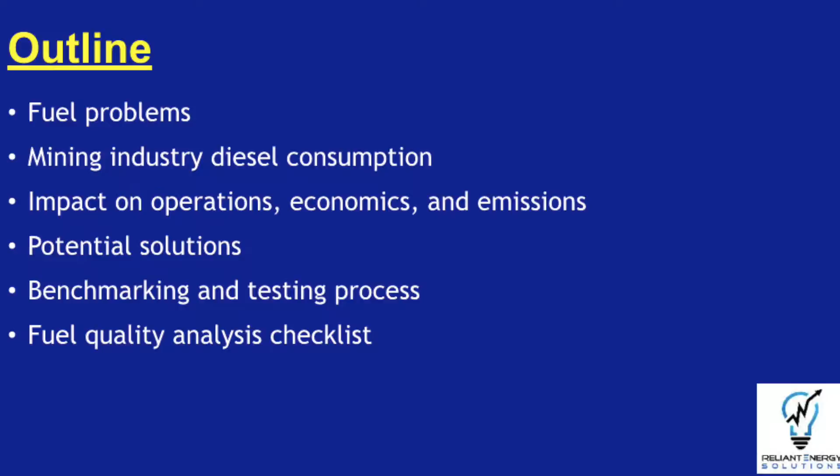Our outline, just going to give you a quick rundown of things I'm going to talk about. Fuel problems, remember it's very, very key. Mining industry diesel consumption, potential solutions that I see in the market, and benchmarking and testing to evaluate the effectiveness of fuel additives, and finally, a fuel quality analysis checklist.

So what are some of the common fuel-related problems that the mining industry is seeing today? This is probably just a partial list, but it focuses on the underperformance of the fuel expenditure made by mining companies. Moisture is a key contaminant because it leads to clogged fuel filters, clogged fuel injectors.

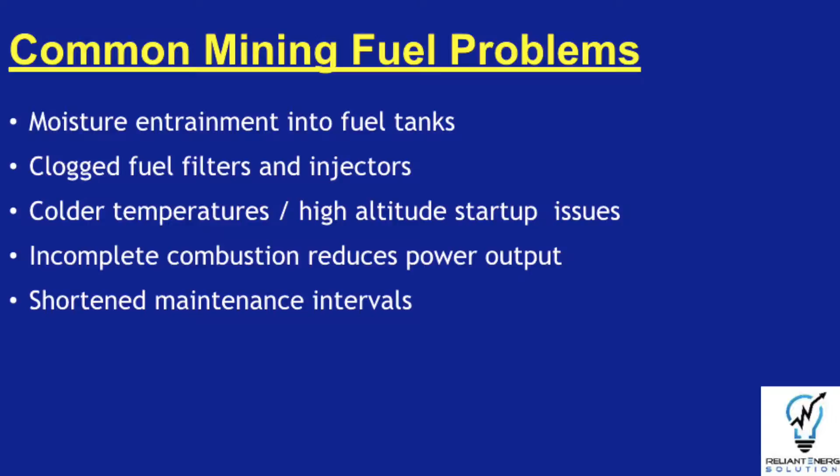Poor fuel quality also leads to the incomplete combustion of the diesel fuel, which wastes fuel expenditure dollars. And finally, the long-term problem of compressed maintenance intervals due to poor fuel quality costs mining companies a lot of money.

So if we look at the top 5 largest gold producers, we see that the relative gold production from 2005 to 2013 has been fairly stable in the 23 to 27 million ounce range. But let's focus now on the increased gallons of diesel fuel required for each ounce of gold produced. Over the last 8 years, it's doubled from around 12.7 to 25.8, or a 9% annual inflation in diesel use.

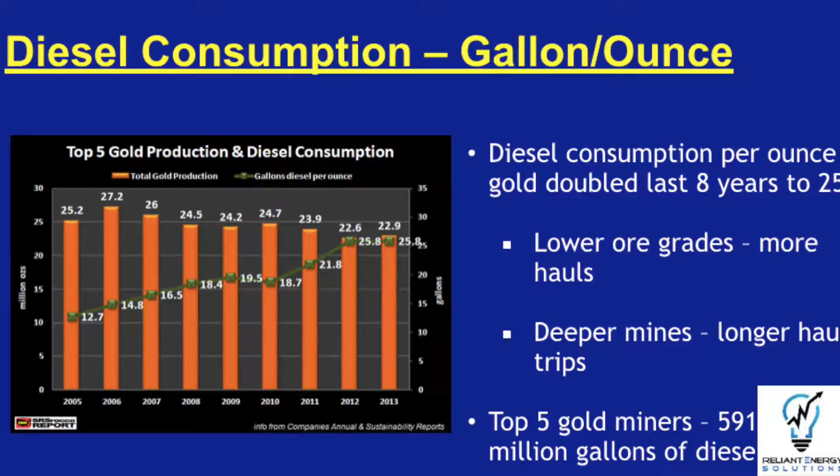So what are some of the reasons for increased diesel use? Well, we've learned earlier the lower ore grades take more ore to get the same amount of finished product at the end. Also, deeper mines, longer haul runs, more diesel consumption. But just for the top 5 gold producers, they've consumed almost 600 million gallons of diesel per year.

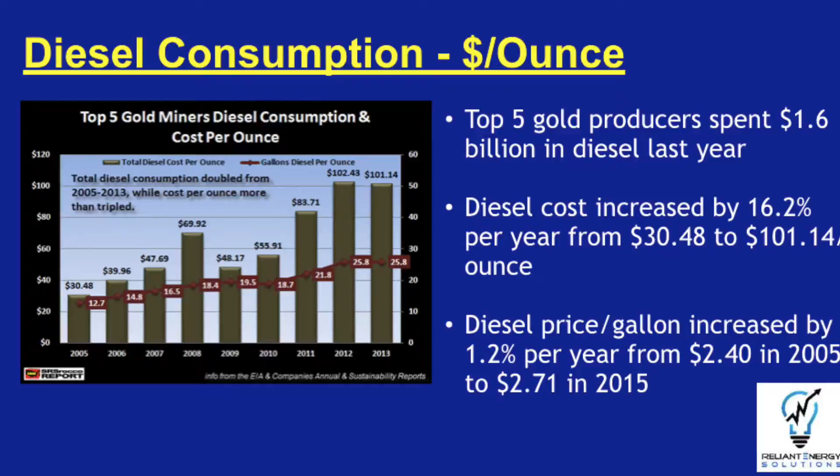Let's change the focus from diesel consumption, not in gallons per ounce, but in dollars per ounce. Not only is diesel use per ounce of gold increasing, but when we factor in the diesel price increases over the last 8 years, it's about a 1.2% per year inflation rate. Total amount of diesel expenditures by the top 5 gold mining companies is around $1.6 billion. Even without diesel price inflation, the use of diesel to produce gold has been increasing at an alarming rate.

So what are mining companies going to do to address this rise in their costs? We need to find ways to get more value out of our fuel expenditure dollars. If you look at the fuel issues, one of the villains of fuel quality and its deterioration is the presence of moisture.

This happens the minute diesel is injected into the storage tank, as shown on the far left, in a clean tank. In areas of high humidity, such as South America and Sub-Saharan Africa, lots of humidity, opportunities at refill for moisture entrainment into the tank start this cycle.

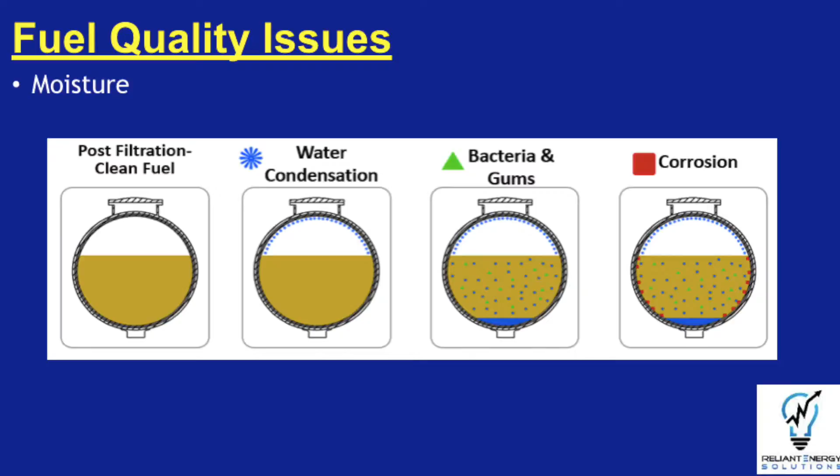Once moisture is inside the tank, as shown by the blue dots on the top part of the tank, second diagram from the left, it hastens the formation of bacteria, gums, and corrosion. All of these factors are bad actors that contribute to poor fuel quality, increased tank maintenance costs, shorter tank maintenance intervals, higher fuel consumption rates, and yes, higher fuel expenditures.

The contaminants in the fuel, remember, bacteria, gums, and corrosion, act to lower the engine's operational performance. They clog fuel filters and fuel injectors. One of the clearest indications of contamination is the residue left behind in the combustion process. You'll see in the simple burn test, the picture on the top. The left container represents the preferred combustion process. Full hydrocarbon combustion, no residue.

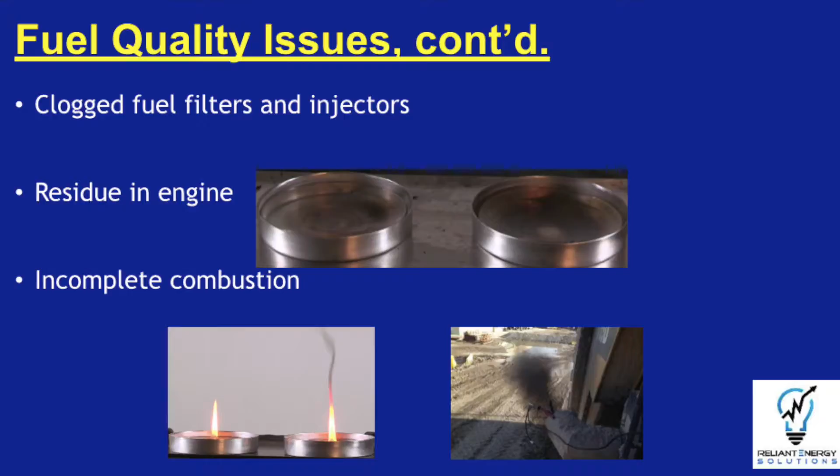The fuel is contributing to the engine's work, and we're getting maximum value for our fuel expenditure. The container on the right has a residue showing incomplete combustion. This residue, think of it as money, fuel expenditure money left on the table. This incomplete combustion process manifests itself also in the black smoke and soot on the bottom picture on the left.

The ideal combustion is the vessel on the left. The poor combustion is the one on the right, with the black soot and smoke coming from that combustion process. Think of your fuel expenditures from this soot going out the tailpipe of that engine, haul truck, or engine generator. Incomplete combustion leads to shorter maintenance cycles and unnecessary costs, and not getting as much value out of our diesel fuel expenditure.

Another adverse effect of poor fuel quality is the engine's ability to provide the maximum power that the equipment manufacturer has prescribed for the fuel expenditure made by the miner. When we examine this thermal image of the combustion process, a few things really jump out. The left combustion has a larger flame, higher temperatures, more soot, more smoke.

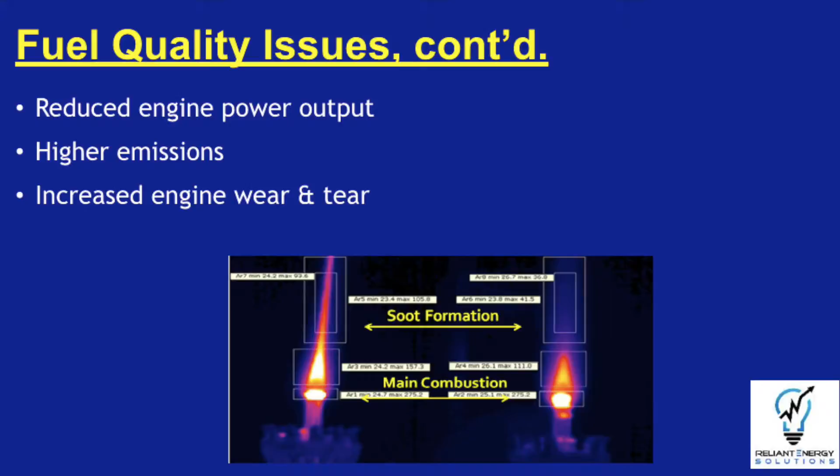Think of the smoke as your fuel expenditure dollars leaving out the exhaust, out the tailpipe of the haul truck or engine. Less productive work for our fuel expenditures. The temperatures are higher on the left, which indicates that more productive work is going out the tailpipe rather than what you're paying for in diesel fuel. Higher combustion chamber temperatures, more engine scarring, point to increased engine wear, compressed maintenance cycles, increased consumption of diesel, and once again, higher costs for diesel.

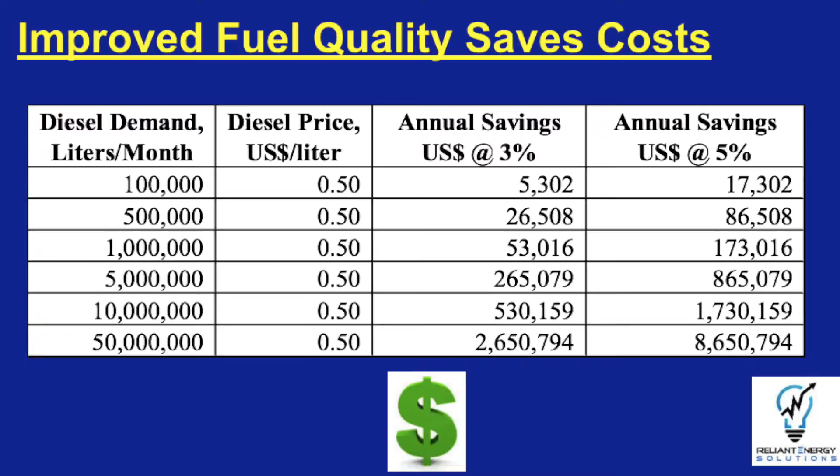As a certified energy manager, I study this issue and look at ways that we can save money on our diesel fuel expenditures. So this chart shows what an increased fuel value with increased fuel quality means to a miner. On the far left, the diesel demand in liters per month, and at a rough estimate, 50 cents a liter, $2 a gallon price of the diesel, you'll see that achievable 3 and 5% savings net of the additive can yield significant amounts of saving for your operation, obviously at different diesel demand rates. This is the Jerry Maguire part of my presentation, the show me the money, if you will.

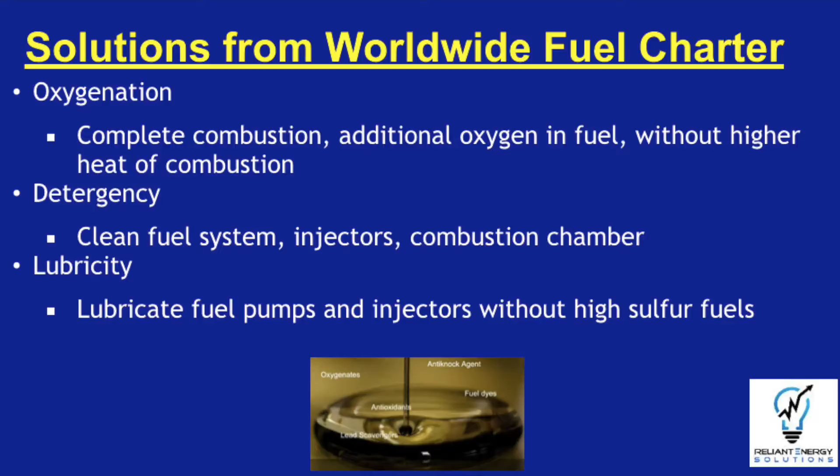So what do we do to correct fuel deterioration, which means that we have less engine work being done, more fuel consumption, higher diesel fuel costs? In order for fuel to do its work inside the engine to reduce overall maintenance, we need three factors, as recommended by the Worldwide Fuel Charter. Number one is oxygenation. This ensures the complete combustion of the diesel fuel inside the combustion chamber. Remember that black smoke and soot is your dollars for fuel leaving out the tailpipe. The second thing is detergency, to ensure a clean fuel system, to clean the injectors, to clean the fuel filters, and prevent those from being clogged.

And finally, lubricity. Since 1993, when sulfur limits for low sulfur diesel were at 500 parts per million, the regulations have been strengthened, tightened, so that in 2006, the regulation for ultra low sulfur diesel was reduced down to 15 parts per million. This sulfur in the fuel in past years helped to lubricate the engine in the combustion process. Without some way of lubricating the engine with an additive with lubricity, you will get some engine scarring, reduced maintenance intervals for equipment.

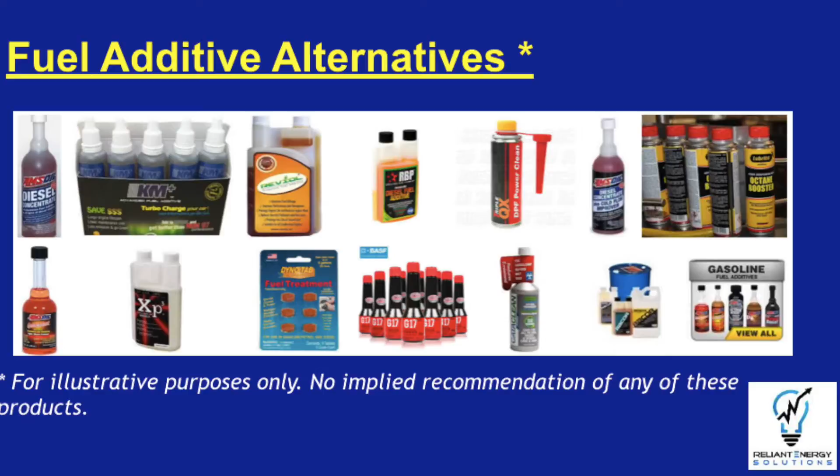There are lots of fuel additives out in the marketplace today, as you can easily see. So what's the right one for your application? Which one has the most economic and environmental impact to your bottom line? And which one gives you the performance that is repeatable and reliable for your mining operations and to reduce your diesel costs? So let's look at some metrics.

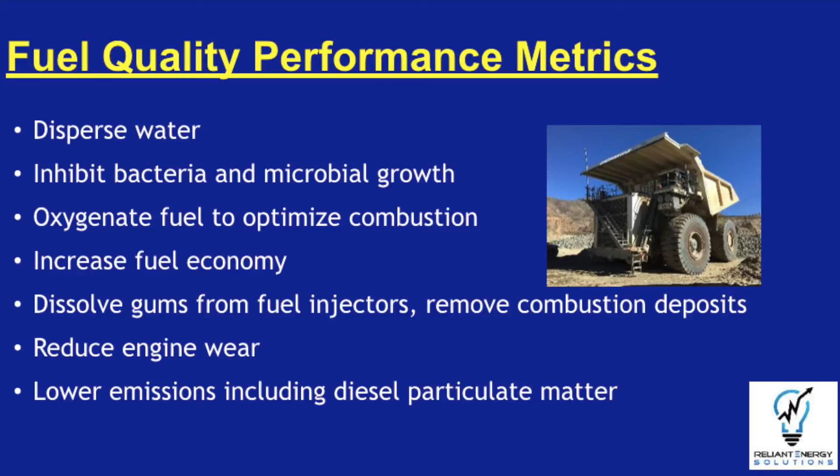So if additives provide value, what are the performance metrics that we should be interested in? Remember the bad actors, water, bacteria, corrosion. They prevent optimal performance and cost us money. The three fuel quality enhancers that we just talked about for fuel economy must be present: oxygenation, detergency, and lubricity. We should be able to document that our operations are doing the same amount of work, albeit with less fuel consumption, less fuel costs. We ought to see lower emissions, lower combustion temperatures, and longer maintenance intervals for our equipment.

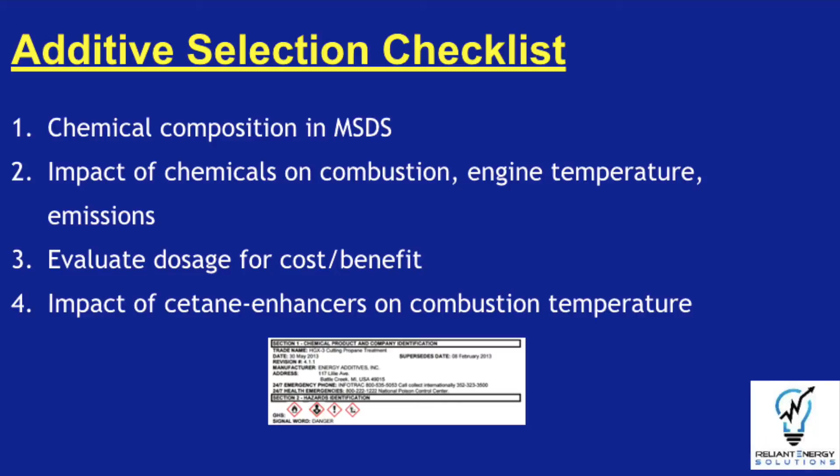So the additive checklist: what things must we have to be able to differentiate the one that does the best performance for our operations? First, we need to look at the chemical composition of that additive. What those chemicals actually do inside the combustion chamber with regards to temperature, uncombusted hydrocarbons, and emissions. What's the correct dose of the additive that we can put into our fuel to not waste additive dollars?

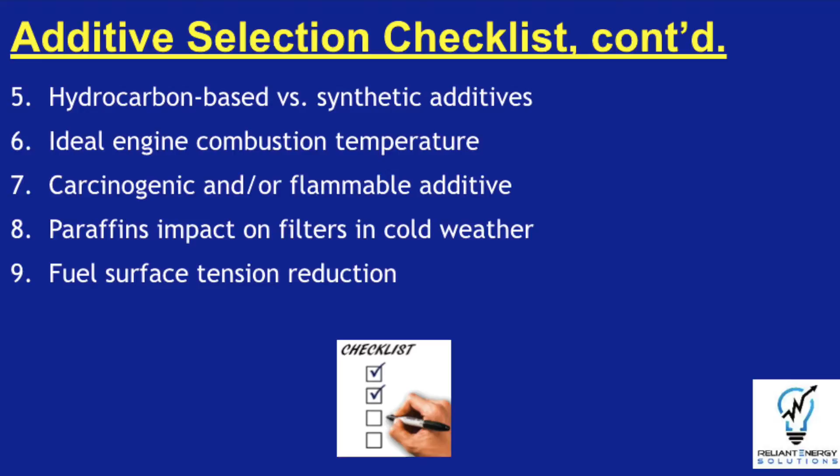Number 7, is the additive harmful if it's spilled? Because we have operating personnel at risk if there is a spill, to make sure that the additive gets put into the tank correctly.

How do we improve engine startup capability in areas of cold temperature and high altitude, where that can play a major part? And lastly, for water dispersion, does the additive have a way to reduce the surface tension so that, not if water and moisture is entering the tank, but when it is, it's dispersed evenly throughout all the hydrocarbon molecules?

As we evaluate additives, I strongly recommend both a lab and a field test. A lab test will tell you that it's safe, but a field test is required to demonstrate performance because it's hard to really emulate the harsh conditions at the mine site in a lab test. Much like a science experiment, the field test must be repeatable and controlled.

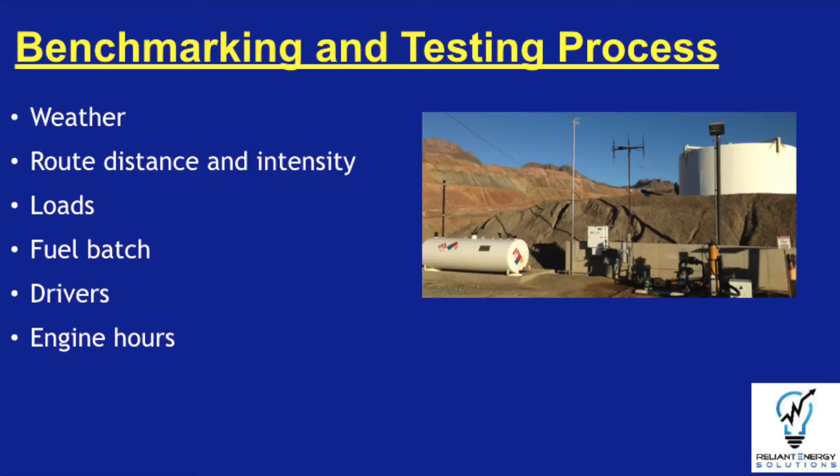So you have both a control and a test truck, or a control and test power generator, to monitor your performance. We want to calibrate all the variables that are shown on the slide to make sure that it's compelling, that our final results from having this science experiment actually determine what improvements in performance, meaning lower cost, lower consumption of diesel. The more definitive and disciplined the test that can be done in the field, the more reliably we can rely on our fuel cost saving numbers.

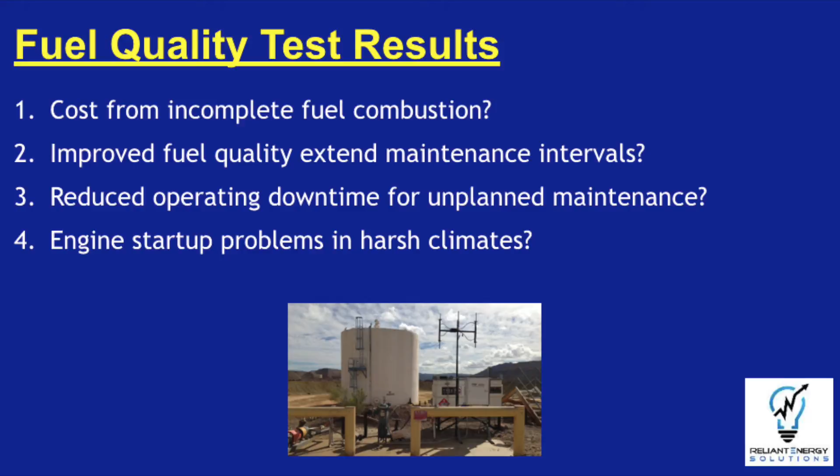So what fuel quality results do we want to document from the field test? We want to evaluate the additive's impact on consumption, costs, and emissions reduction. With the use of an oxygenate, we want to make sure that the fuel is used, it's doing the needed work, but at a lower fuel consumption rate. Once an additive is determined to do no operational harm, we want to monitor and measure the impact of that additive on our long-term maintenance cost, our long-term maintenance interval.

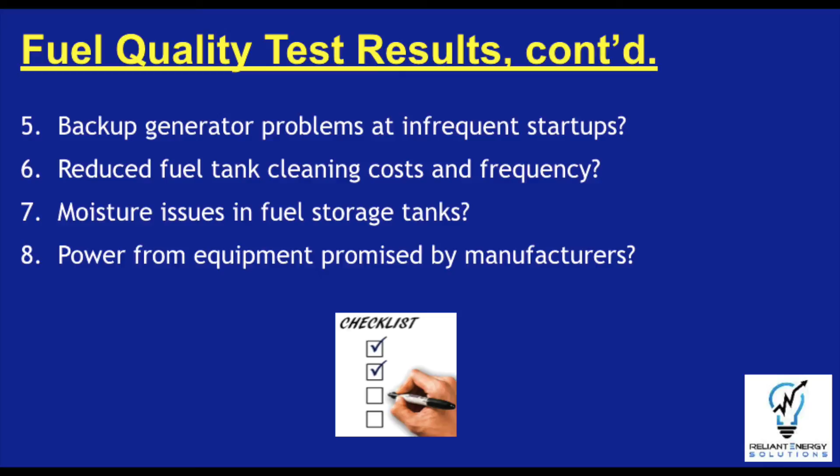So what operational problems that we've had in the past are resolved, if any, from the additive's use, such as startup in cold weather, etc. We need to confirm that the additive fuel savings and increased reliability is present in our backup generator at our mine site. Some of these generators do not use fuel all the time, hence the word backup, so you can have fuel contamination over a long period of weathering of that fuel.

We want to document that we have less moisture issues inside the tank, that we maintain a higher fuel quality. And finally, we want to validate that the trucks and the generator engines are delivering the same power as promised by the manufacturer, albeit at a lower fuel consumption rate.

So in summary, there's 5 things to remember. Bad actors for fuel quality are moisture, bacteria, and corrosion. They deteriorate the fuel quality and rob mining companies of their diesel fuel expenditure dollars. Fuel additives need 3 components: oxygenates, detergency, and lubricity. Number 3, better fuel quality leads to longer maintenance intervals and reduced long-term costs.

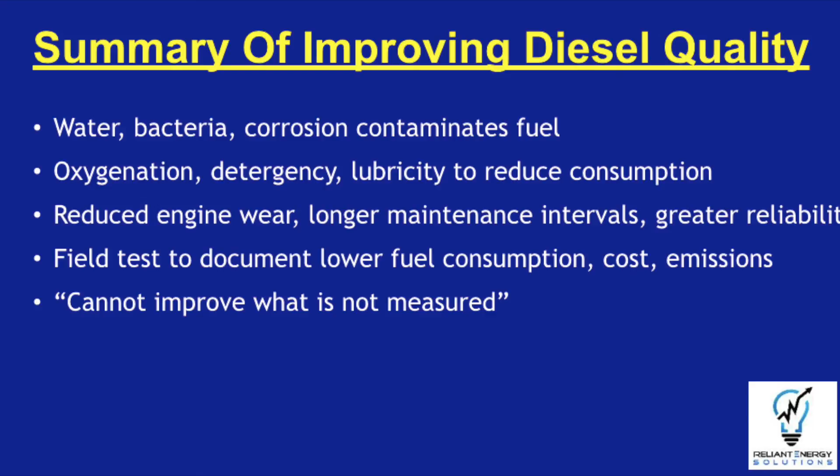Number 4, always monitor a field test to accurately determine if we're getting the same results that we anticipate when we start this test or science experiment. And lastly, you cannot improve anything you don't measure. As you look at your fuel expenditures, demand accurate and robust tests of all fuel additive candidates to make sure that they definitively determine value to the company.